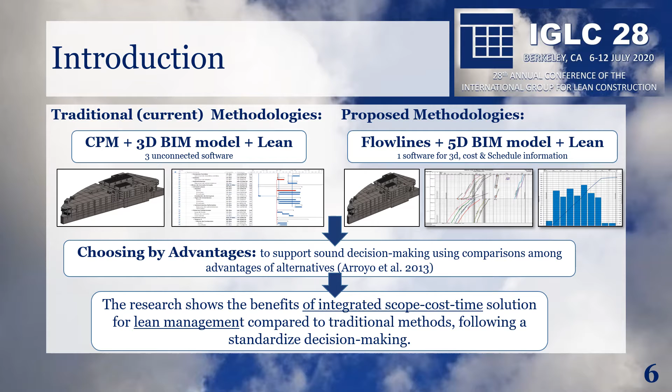So, the case of study of the research involved planning the foundations and concrete structure stage of an office building. This had as constructed area 24,000 square meters. And to elaborate the research, we followed 5 steps. The first one was the framework of traditional methods. The second was gather scope, cost, and schedule information. The third was the elaboration of 3D and 5D modeling.

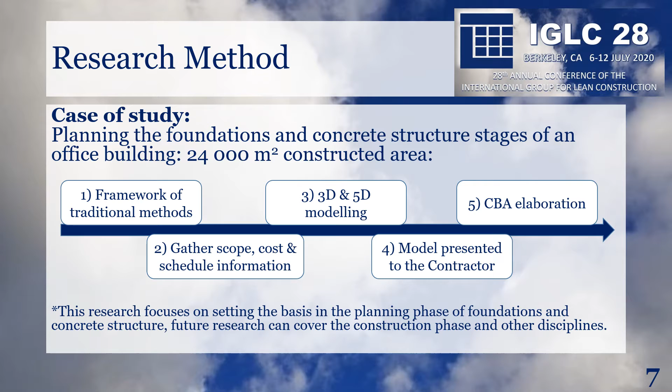Then in the step 4, we presented the model to the contractor. Discussions were made to determine the factors, criteria, attributes, and advantages of planning with the 5D model in comparison to the traditional 3D and 4D models associated with CPM. And then the input was gathered to elaborate the CBA.

So the proposed methodology was the use of 5D models based in flowlines. To do this model, we follow 4 steps. The first one was the 3D modeling and the defining of locations. The second was the integration of cost, schedule, and scope information in one database. The third was the elaboration of flow lines.

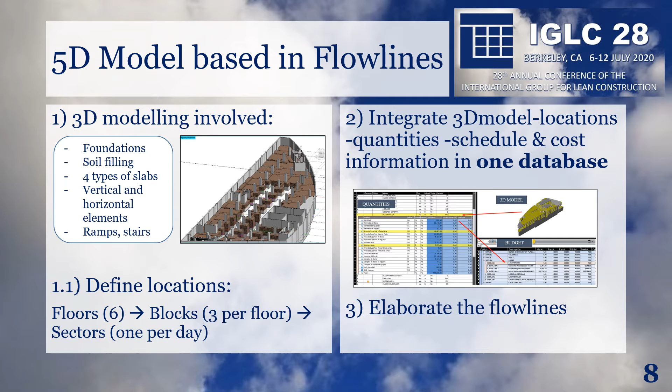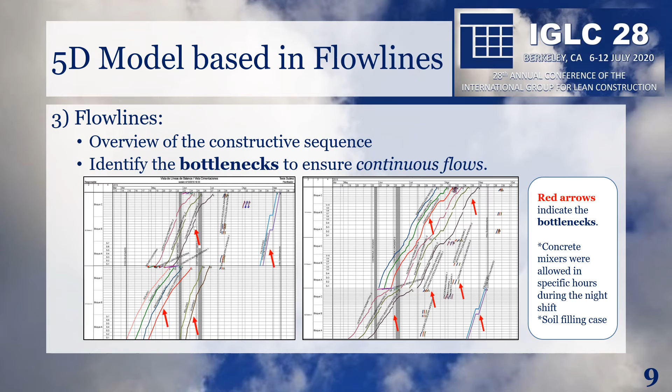In this, we have several steps too. That was first the overview of the construction sequence in the project. The second was identifying the bottlenecks to ensure continuous flows. Here the red arrow shows the bottlenecks. Then we align the slope of the bottlenecks based on the production demanded by the internal milestones. The slope of the bottlenecks was identified as the backbone. The slope can be identified by the red arrows too.

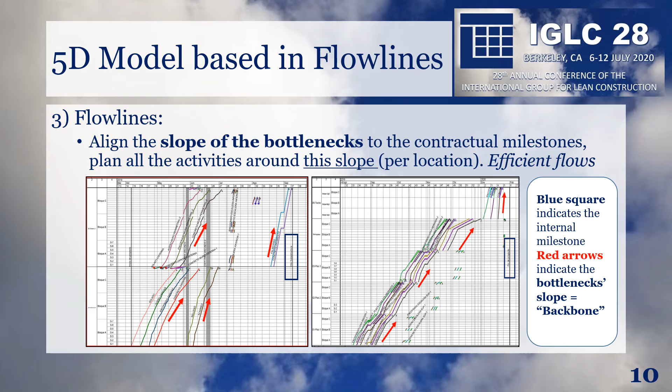Then all the activities within the middle level locations, which are the remaining activities, were aligned guided by the specific backbone. Finally, some opportunities of improvement were discovered for the planned resources. We adjust the slope of the remaining activities and discovered that activities like rebar and soil filling needed an adjustment.

So after the schedule with flow lines was done, we obtained an automated cost and resources report for all the details needed per time or per level of detailing cost.

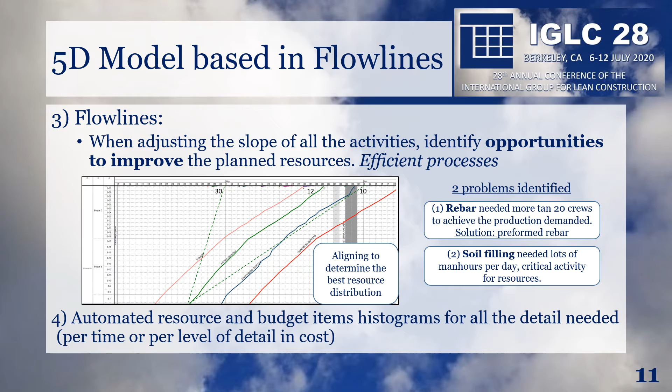Then the methodologies were evaluated using the CBA system. We had 3 evaluated alternatives. The first one was 3D models, CPM plus Lean. The second was 4D models plus CPM plus Lean. And the third was 5D models plus location-based management system plus Lean.

The third alternative was the one that was proposed by the researchers to the contractor, and 1 and 2 were the traditional methodology used by them. In collaboration with the contractors, 8 factors were identified in the discussion, so I'm going to briefly mention them. The first one was plan an effective lean production system. The criterion was ensuring an effective lean production system is better.

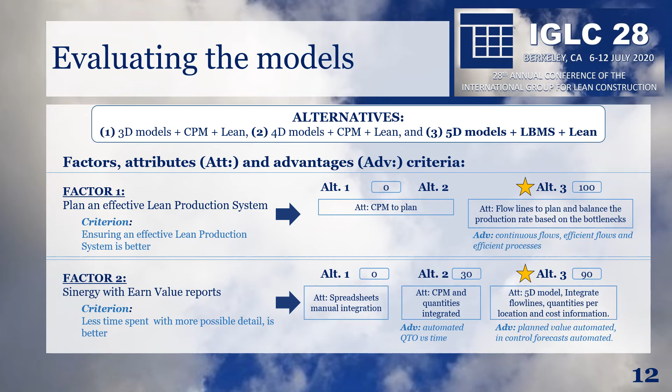Factor 2 was synergy with earned value reports, and the criterion was less time spent with more possible details is better. Factor 3 was scheduling automation, which was less time spent is better. Factor number 4 was scheduling understanding. The criterion was better understanding from the engineers was better. Factor number 5 was learning process, and the criterion was less training hours needed was better.

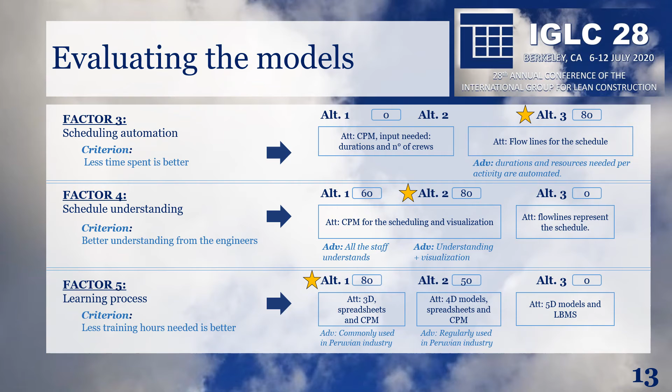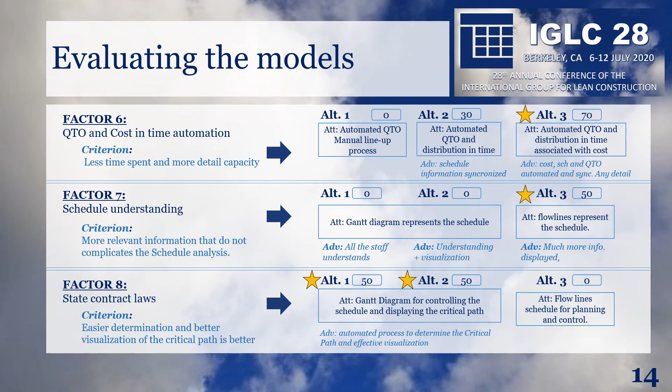Factor number 6 was the quantity takeoff and cost and time automation. The criterion was less time spent and more detailed capacity was better. Factor number 7 was scheduling understanding. The criterion was more relevant information that does not complicate the schedule analysis was better. And the final factor, factor number 8, was state contract laws, and the criterion was easier determination and better visualization of the critical path is better.

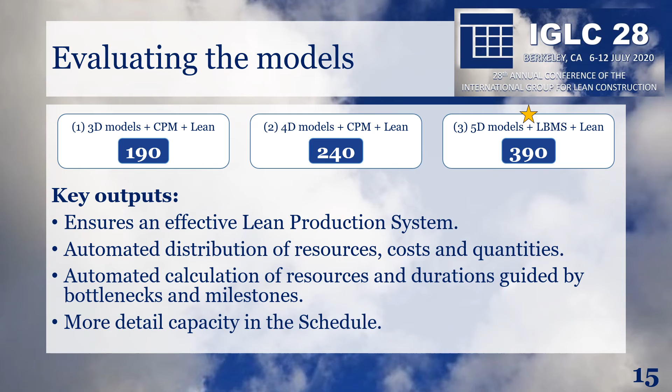So as a result of the CBA analysis, we obtained that alternative 3 was the preferred one. This was the alternative that was proposed to the contractor and involved 5D modeling, location-based management system, and Lean. Some key advantages of this analysis were that alternative 3 ensured an effective lean production system, automated distribution of resources, cost, and quantities, automated calculation of resources and durations guided by the bottlenecks and milestones, and ensured more detailed capacity in the schedule.

So, to sum up, in this research we found that there are 2 principal problems associated with the traditional methodologies and tools used by the contractor. The first problem is the lack of synergy, and the second is the lack of integration. This led to more working hours and less application of lean philosophy. We proposed a methodology to the contractor to avoid these problems. This was the use of 5D models plus location-based management system plus Lean, and this was implemented in parallel in the planning stage of the case study.

To elaborate the proposed methodology, we had to develop a flowline schedule. This was guided by the bottlenecks that were identified in the early stage of the scheduling. The bottlenecks identified were the ready-mix concrete pouring process and the soil filling process. After these bottlenecks were identified, we identified the slope of these bottlenecks guided by the internal milestones of the contractor. The slopes of the bottlenecks were called the backbones of the schedule.

Then we used a CBA analysis to compare 3 alternatives. The traditional methodologies were alternatives 1 and 2, and the proposed methodology was alternative 3. Alternative 3 was the preferred one and allowed us to plan an effective lean production system, report the baseline automatically with more detailed capacity, and have more automation in the resource and duration calculation, in the cost reports, histograms, and quantity takeoff process.

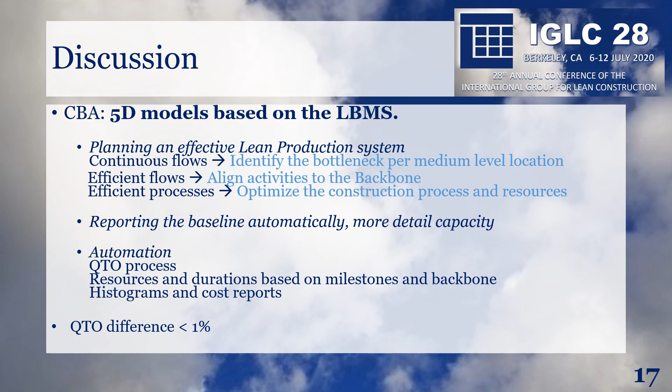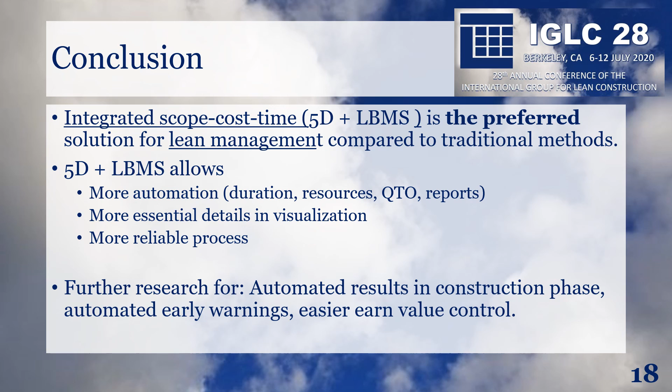So, as a conclusion of the research, we found that integrated scope, cost, and time is the preferred solution for lean management compared to the traditional methods. 5D plus location-based management system also allows us to have more automation, more essential details in visualization, and more reliable processes. Further research must be conducted to determine the automated results in the construction phase, automated early warnings, and easier earned value control.